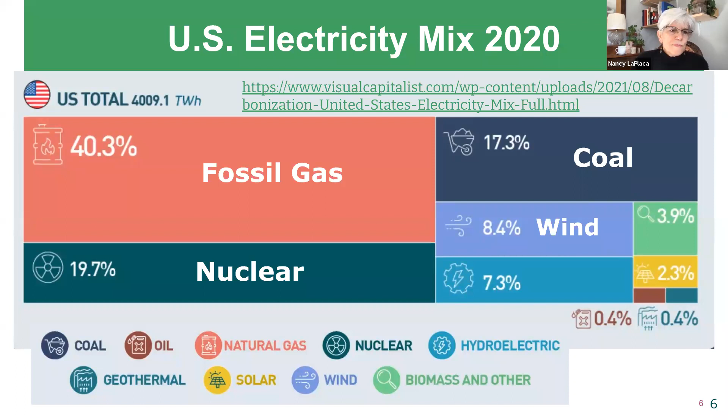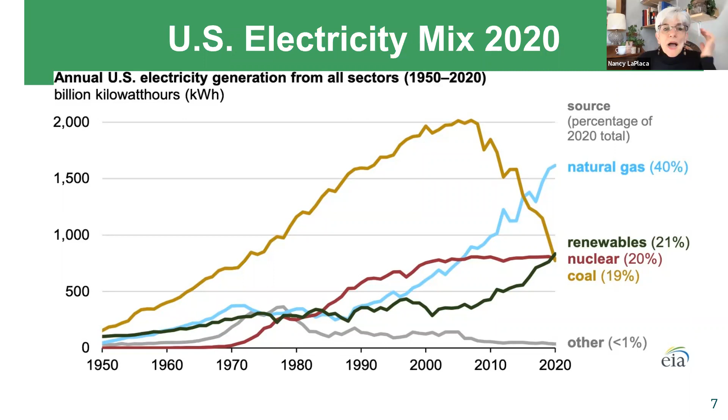Whereas thermoelectric power plants, most of them in this country have cooling where you recycle the cooling. Some of them have once through, which means they take that cooling water and they dump it. But more and more power plants have recycled water. However, just because that water is recycled doesn't mean that it's not full of contaminants. And I'm not going to get into that in depth, but that is certainly something that people should be aware of, especially if you live near a power plant.

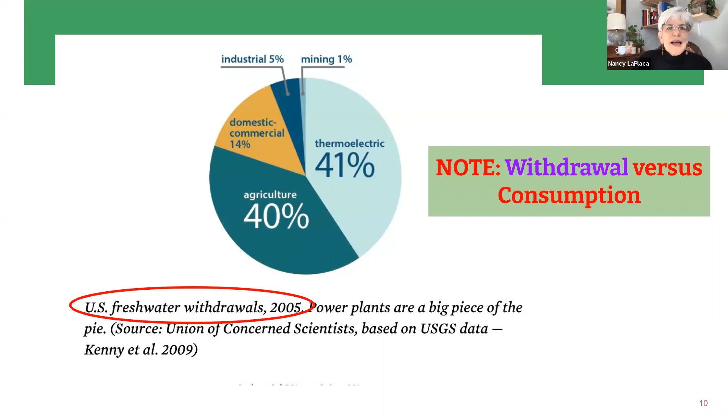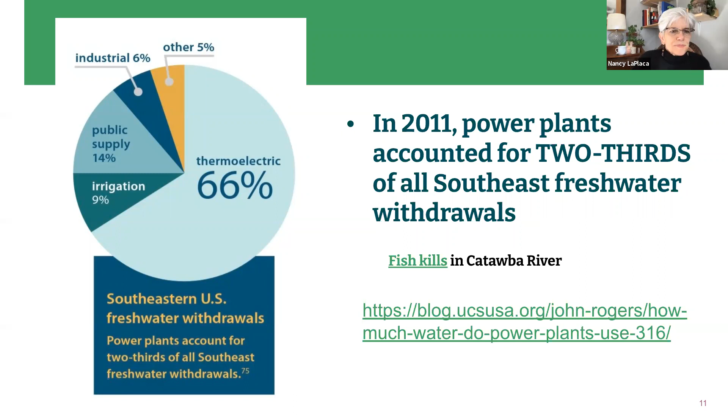And to explain why this is difficult, let's first hit coal. Coal has so many contaminants that the produced water, the water that the coal plant uses, is called a blowdown. And the blowdown, which goes through the various pollution control devices, is full of contaminants. It's just chock full of contaminants. I'm not going to go much into that either, but if people are interested in it, let me know and I can send you some helpful links.

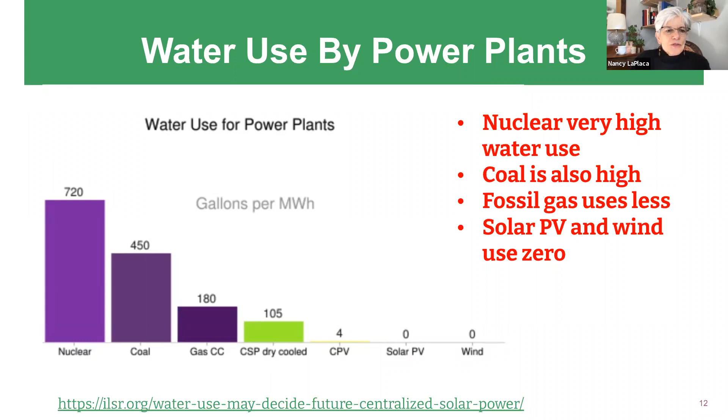So if you have a hydropower plant, you need water. And if you don't have water, you can't run the hydropower plant. So far, Lake Mead, which is the largest water reservoir in the country, which until the drought lowered the level of Lake Mead, powered 2,200 megawatts of hydro, is now down to about 1,500 megawatts of hydro.

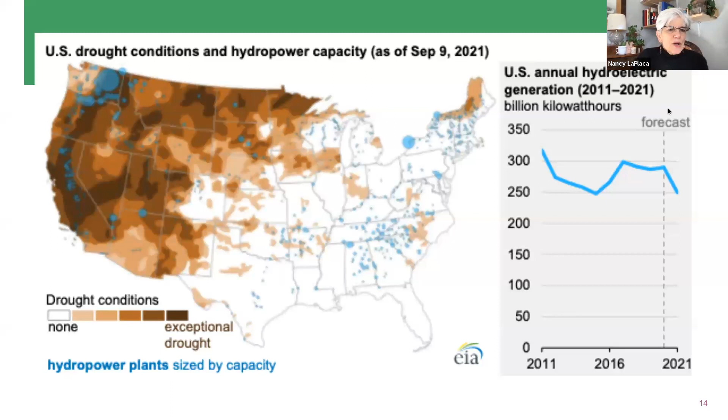And that's even with changing out the turbines so that the turbines can deal with a shorter head. And that's what they call the depth of the water in the reservoir. And that depth of water, the weight of the water, helps to drive the turbine. So when you have less water, you have less weight, and the turbine doesn't run as efficiently and produce as much energy.

So let's hit slide 15 here. And actually, this is a good place to stop. Kathy, do we have any questions? Not yet, Nancy. Okay, all right, well then power on here.

So powering on, slide 15, we're gonna look at power plants here. And let's go to slide 16. I promise this is about the most complicated we're gonna look at. And the link to this, which is from Penn State, from an online course they have in energy, is a good chart that shows a few things that we are all going to be concerned with going forward, all of us who want to replace fossil fuels with clean energy.

Why? Because of fuel. Because a simple cycle gas turbine, which is also called a peaker, which is also called a combustion turbine, a CT, they use a lot of fuel. It's the same as a jet engine. It's bolted to concrete. And so that's why it uses a lot of fuel. It uses a lot of fuel because it's very highly flexible. It turns on immediately. But the trade-off is that it's very expensive and it uses a lot of fuel.

So let's look at the technology list here. Simple cycle combustion turbine, that's a peaker. Ramp time, minutes to hours, they come on right away. That's why the utilities use so many of them. That's why there are so many on standby. So the minimum runtime is minutes.

The utilities know that these power plants are expensive to run. And really, simple cycle combustion turbines, in other words, peakers, basically are designed to run for 1% to 5% of the hours in a year. That's not very much. And frankly, that's why batteries and solar plus batteries are beating peakers.

They're beating them first in the places where you've got very low cost renewables and where you have rules that allow batteries to be compensated. Again, we'll get into more depth in that in the next session.

So let's look at the second one, combined cycle combustion turbine. That just means a combustion turbine with another cycle wrapped around it, or they call it a HRSG, and that's a heat recovery steam generator. Anyway, it captures the waste heat. But you'll notice that the ramp time is hours. So if the utility needs power right away, it's not going to work. And the minimum runtime is hours to days.

Now, nuclear is interesting because, look, it takes days to ramp up that plant. And the minimum runtime is weeks to months. And this is a weakness of nuclear plants. If it doesn't run enough hours, it is not cost competitive.

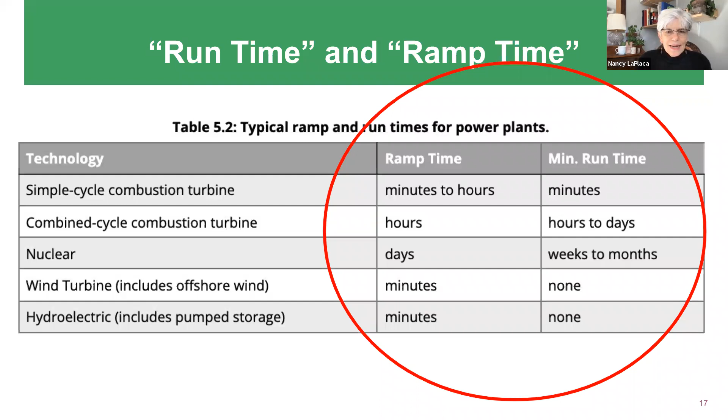Where is battery storage going to be cheaper than gas peaker plants first? Well, places that have low cost renewables and places that have rules that allow battery storage to compete economically with power plants. Because if there's one area of regulation that needs good rules, it's battery storage. That is where we need good rules that allow us to pair batteries with solar in North Carolina so that we can start shutting down some of these old dirty peakers.

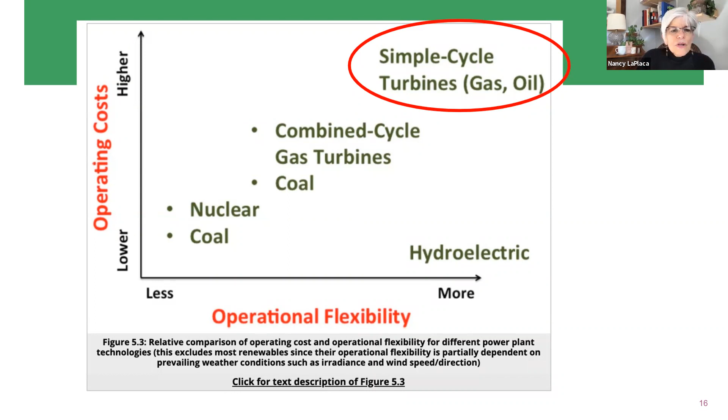So we're going to get more into this, Kathy, in our coal section. So let's go to 19, Andrew, if you're not already there, and then move to 20. So if I don't answer your question, Kathy, ask me again.

Okay, so slide 20 on coal plants. I put a lot of verbiage here because I want people to understand coal plants in this country, because we have shut down a third of them, but we still have 2/3 to go. And the average age of a coal plant is about 35 to 40 years. And what industry is mostly doing is shutting down the old ones first.

But here's where what they're doing in North Carolina is not that. In fact, it's much worse. It's terrible. What they're doing, Duke Energy, is they're taking these very, very old coal plants and they're converting them to natural gas. And so they're very inefficient. And so whereas most states are shutting down these very old coal plants, unfortunately here in North Carolina, we've taken a lot of those very old dirty coal plants and converted them to natural gas.

So again, my point here is we have shut down a third of the US coal plants, but we still have to shut the rest down. And if we are serious about climate change, there is no reason to run them. And again, something that just really gobsmacks me, especially with all of the new advocates that are out there and the interactions I've had with so many wonderful, young, dynamic advocates that are in North Carolina, is it just hits me in the face. All these decades, we have ignored these staggering health and environmental costs. It's been ignored by utilities, it's been ignored by regulators, and that has to stop.

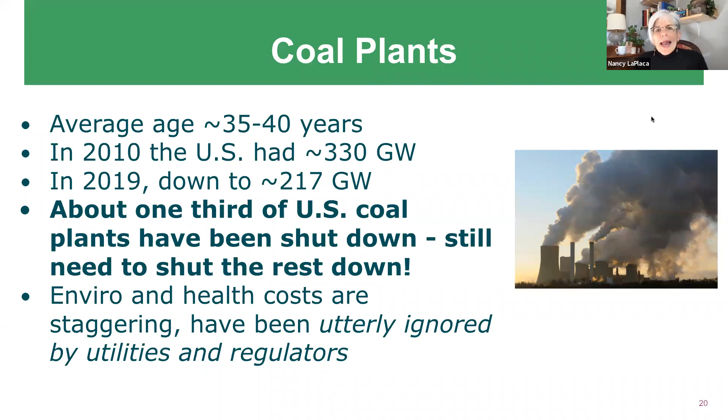So let's go to slide 21. And this is something that we all, I think, have to be aware of. This year, in 2021 and in 2020, coal use went up, okay? Here we go. Coal bucks a 15-year decline in the US with a 22% increase. That's because the cost of natural gas has doubled, right? From about $2 to $2.50 a million BTU, to about $5.50 a million BTU. And so what are the utilities doing? They're turning to coal.

Now, here's where I want to mention what Germany does. Germany has rules that they actually stole from a US law called PURPA, the Public Utility Regulatory Policies Act of 1978. And what they said in the German rules was, if you have clean energy, you must dispatch it first. We have terrible rules in this country that the regulators could change. The regulators could change this, so that if you have clean energy, it must go to the top of the dispatch list. And so what that means is that you don't let utilities dump clean energy.

What I saw in Arizona, which is a tragedy, is that utilities are dumping solar and burning coal. They're still doing that. Why? Because they make more money from coal. And that is unconscionable, but that's what they do because the rules let them do it and the regulators let them get away with it. So we're going to go into more detail on Germany on the next one too, but the German rules are very simple, there's only 3 of them. Basically, if we could get those 3 simple things, our market would change basically overnight in this country.

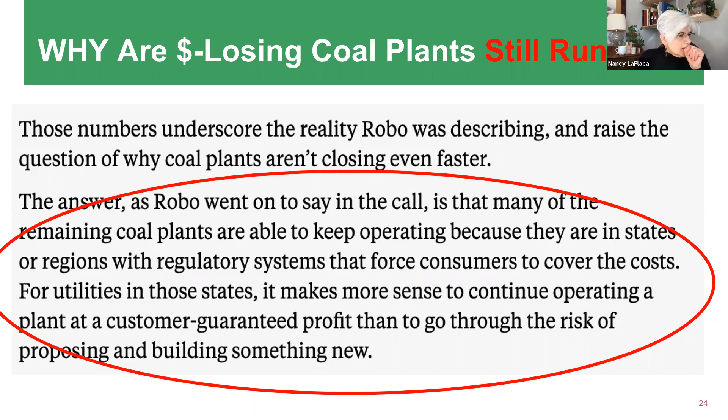Slide 25. Sorry, I need some water. Thank you.

So look at what the CEO of NextEra says. He doesn't name the states, but the writer of the article from Inside Climate does. And it basically includes North Carolina. As I will show you in the next couple slides, let's go to slide 26, Andrew. This is a study that's now 2 years old, 2.5 years old. And basically, again, what we're talking about is a crossover, right? At what point does coal become more expensive than local wind and solar?

And if we don't have an open, transparent process where everyone can look at the assumptions and weigh in on them, we just have to buy whatever Duke Energy tells us. And unfortunately, that's how it's been for a very long time. 10 years with no evidentiary hearings, it's a tragedy, really. So let's go to slide 27, because I first saw this on a Twitter feed of Tyler Norris. Get on Tyler's Twitter feed if you want to really follow what's going on in North Carolina and South Carolina. He posted this, and it's from the study in the previous slide by VCE and Energy Innovation.

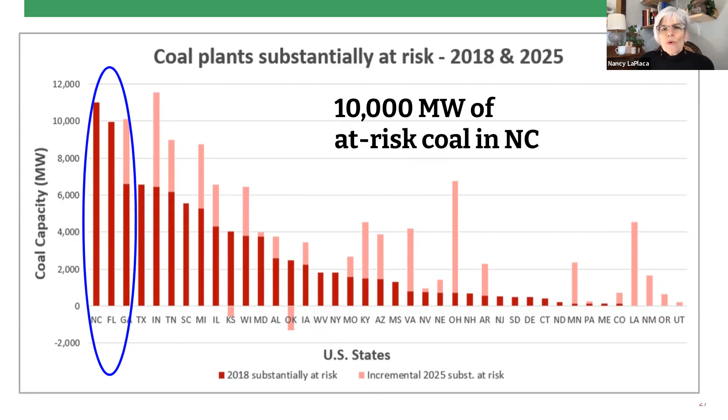Not right now, Nancy. Okay. Soldier on here, folks, and thank you for listening to all this detailed stuff.

Now, there's been different times across the country when power plant costs have jumped relative to the location. So when I say Henry Hub natural gas spot prices, what I mean is down there in Louisiana, which is where the Henry Hub is, that's how much gas costs you on the spot market. Well, what's the spot market? That means today or maybe a few months from now.

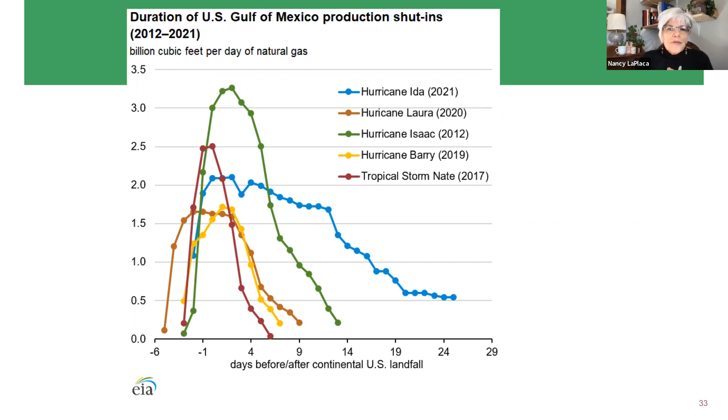So slide 34 here, this is something to watch because US heating bills are going to jump. They're going to really jump. I took the slide out, but I've got it in another version of this that I'm going to post with a whole bunch of slides we didn't have time for. Basically, the point I wanted to make is, when you have parts of the country, like let's just say the Midwest, they don't have any natural gas production. They're very far from Texas. They're very far from Pennsylvania. They're very far from where the natural gas is produced, the fossil gas. Their bills are going to go up even higher. So the amount of money that you pay for natural gas changes depending on where you are in the country. But what they found on average is that people's natural gas bills are going to double.

So let's go to slide 35, because this is some really good news when it comes to all this stuff. This was done around 2014. It was right after it happened. I remember getting this slide around 2014. It was done by an analyst at AWEA, the American Wind Energy Association, which has now changed its name. There's a link in the speaker's notes, and here's what just gobsmacked me.

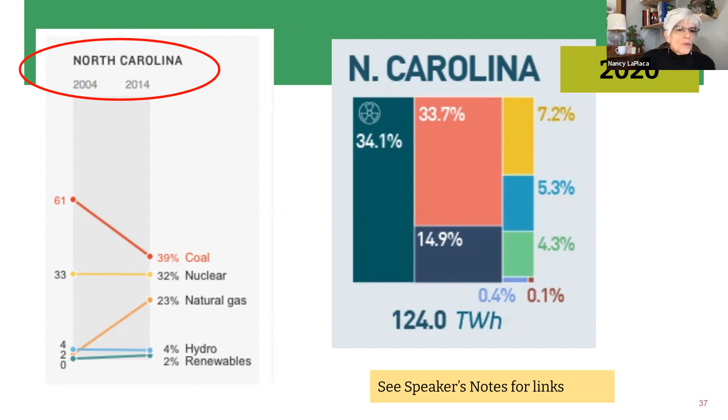But basically, you can get information on the power plant. How old is it? When was it built? What's the emissions profile? Has it been changed to run on natural gas? Was it shut down? If so, what year, etc. And reach out to me if you want some data on any specific plant, and I'm happy to share that. So let's go to slide 40.

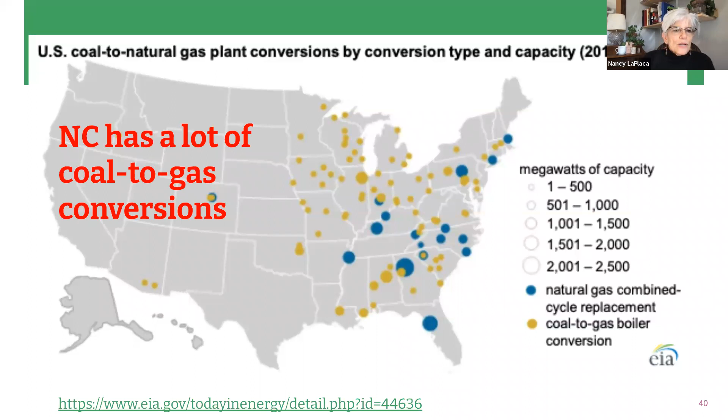Okay, so let's go to slide 41 here, Andrew. And I want to mention LNG. Okay, and then slide 42. What is it?

Okay, LNG, liquefied natural gas. What is it? Well, again, you take a gas and you chill it to minus 260 degrees Fahrenheit, somewhere between 240 and 260. That takes a lot of energy. And why do you do that?

You do that so that you can turn it into a liquid and you reduce its volume to 1/600th of its original volume. So in order for it to remain in that liquid state, right, you have to keep it cool. You have to have special infrastructure that keeps it cold, because if you don't, it will explode. It will become a gas again. As it warms, it will expand, and it will expand and expand and expand until it blows up whatever's keeping it in the container.

The other thing to remember is that LNG terminals are some of the most expensive infrastructure projects ever built. And if you want to see something wild, Google the 10 most expensive projects in the world. And literally 8 of the 10 are LNG terminals. And they range in price from $5 billion to $120 billion. Okay. $120 billion. That is a lot of money. Those are the ones that are in Australia.

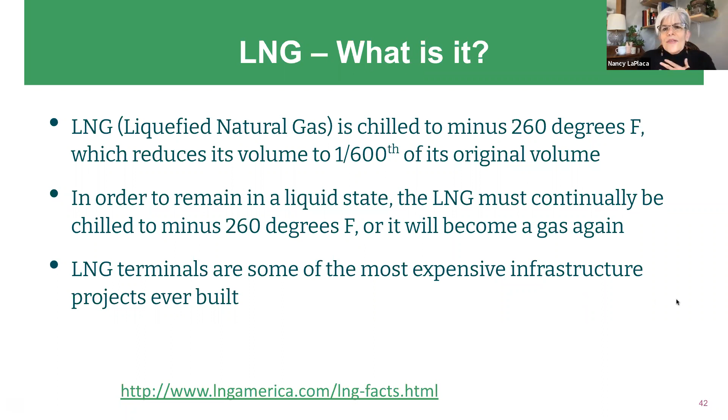They apply a lot of energy to chill it to minus 240 degrees Fahrenheit and stick it in that boat so that it's 1/600th of its volume, right? And then that boat uses a fair amount of that LNG on board, I believe it's about 7%, to keep that gas chilled to minus 240 degrees Fahrenheit while they take that boat and send it across the ocean over to, let's just say, Japan.

And then in Japan, or wherever it ends up, Korea, China, Japan, there's something called a regasification terminal. That's another very expensive infrastructure. And basically, it takes that gas and turns it from a liquid back into a gas so that it can be piped out and used.